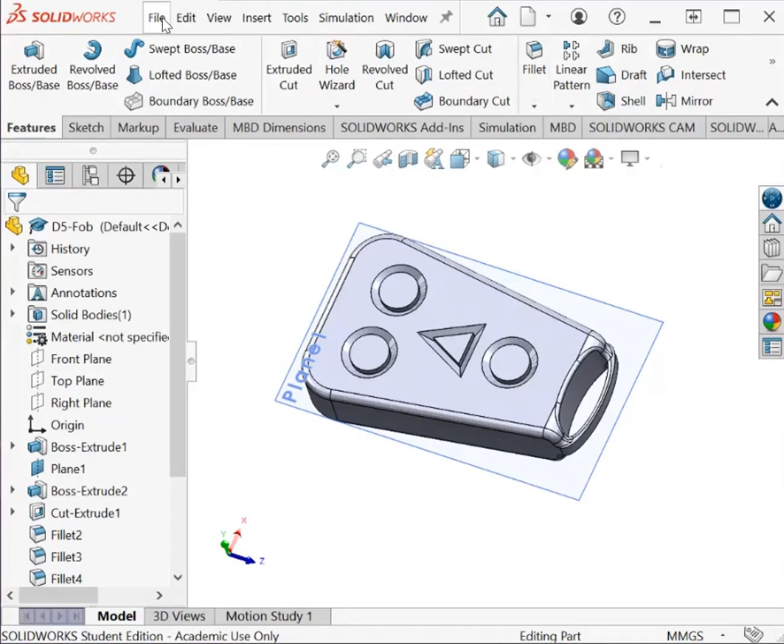Like any other part I draw, I'm going to get a new part to start with and hit OK. Now I have a blank drawing surface. The first thing I want to do is start my sketch, and I'm going to sketch basically a trapezoid.

I'm going to sketch on the top plane, and put a center line in, because this is also a good opportunity to practice our mirror tool. So I have a center line in here. If you draw a regular line, that's fine, just make it for construction.

Then we're going to draw in half of the trapezoid, going from here to here. Notice I'm waiting for the lines to pop up, showing parallel. For that center line, it doesn't matter that it sticks up on one side or the other.

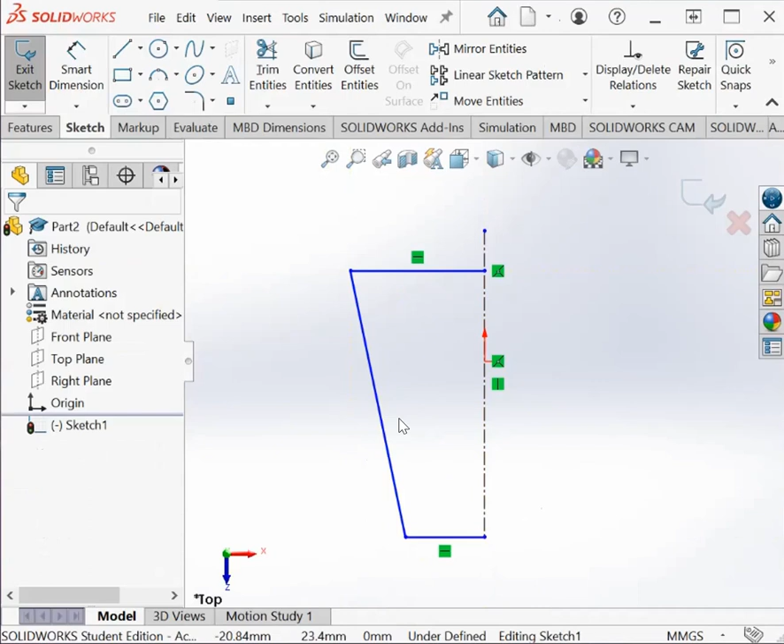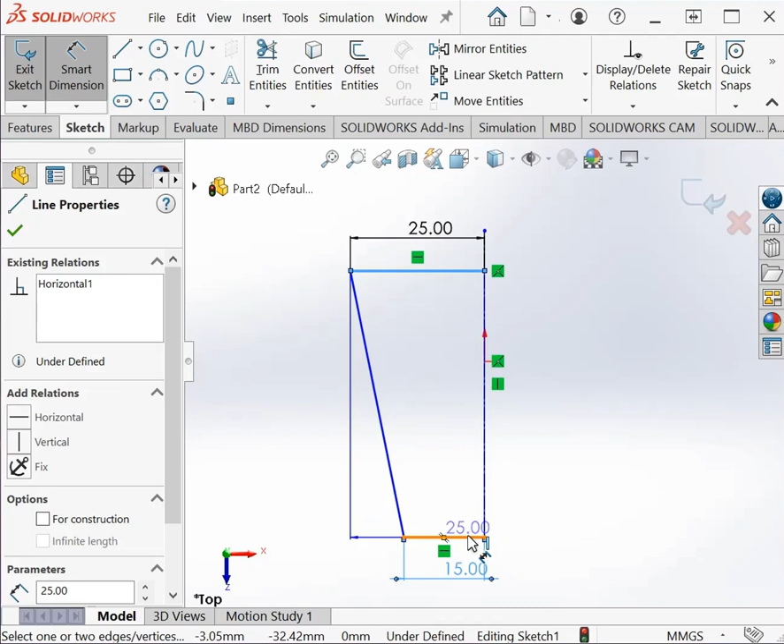Then we want to dimension it. I'm going to dimension this, scroll down to the number, that should be 25. And then this one's going to be 15. And between these two lines is going to be 70. If I had made this the same length as the line, I'd have just one line to make 70, but now I have two separate lines, so I need to select this line, hold down the control button, select this line, and then make that 70.

I'm going to zoom out a little bit. Notice my center line doesn't go all the way up - that should not matter. Now I want to mirror my entities.

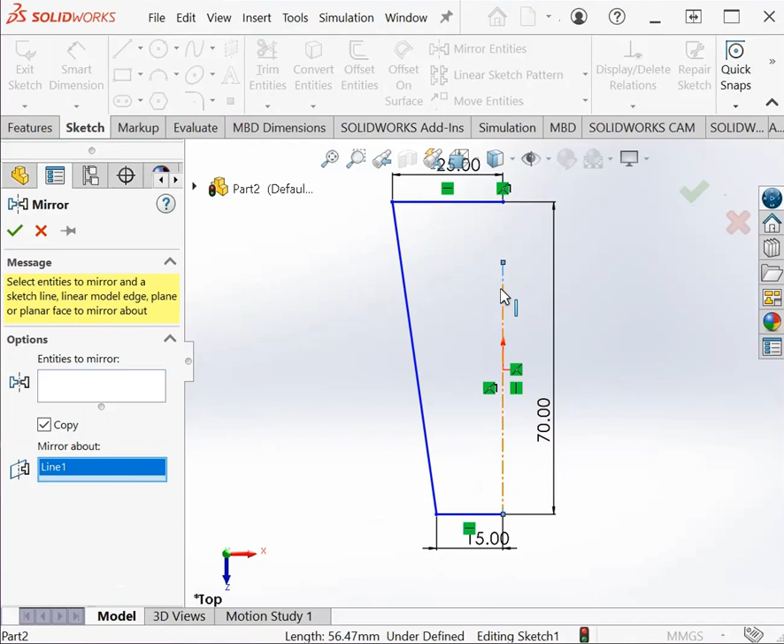I like selecting the mirror about first, so I'm going to mirror about that center line. The entities to mirror are the three lines that I just drew. That's why I like to select this mirror about, so I can see that it's correctly drawing those new lines, and hit enter. So now I have a trapezoid.

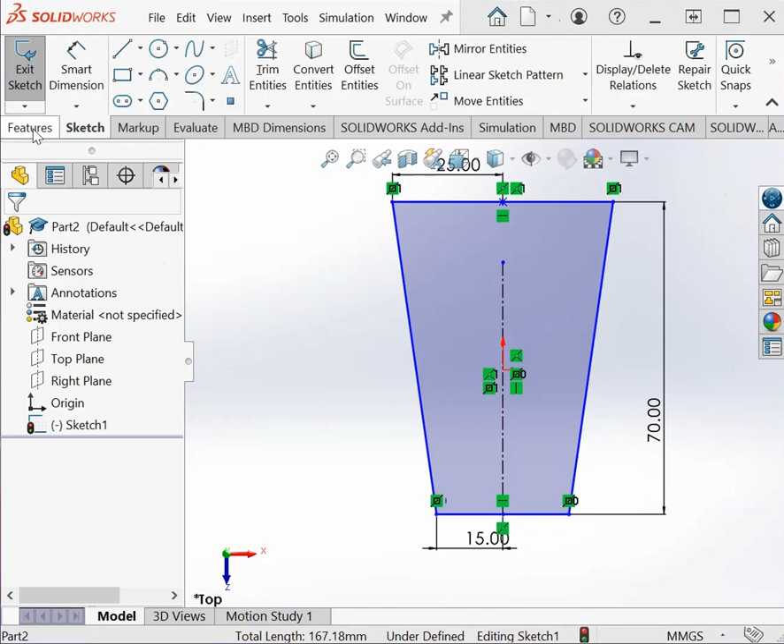So that is a fine trapezoid. Then I now want to extrude it, and we're going to go up 15, because that's the thickness of the key fob that I have. So that's 15 millimeters, 1.5 centimeters, and we have a nice trapezoid.

We are eventually going to round off these corners, but for now we're going to leave those be, and we're going to sketch a little ring down here to put your key ring on.

To do that, I want that in the middle of this. I could have maybe drawn this up and down, but it's still hard to select the top plane at this point, so I need that reference geometry.

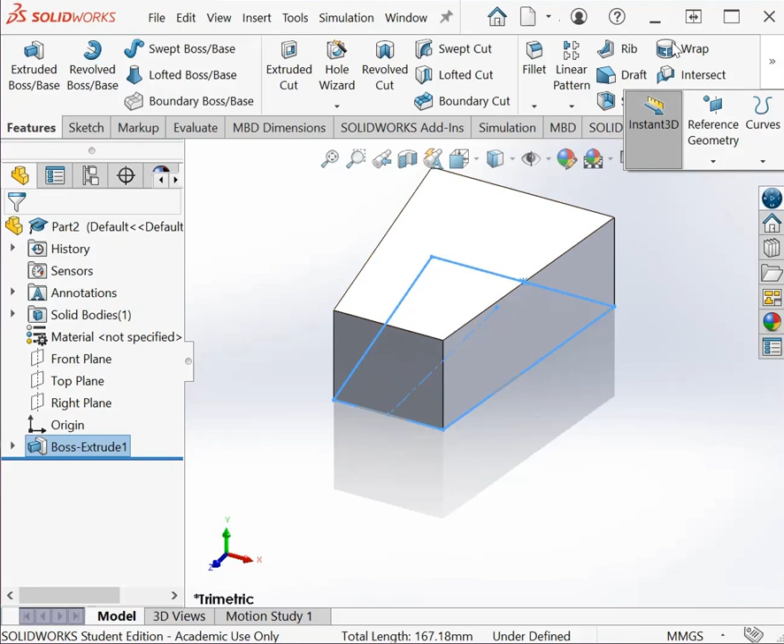My screen's a little narrow right here, so I'm going to go up to reference geometry - if you have your screen full screen, you should be able to see the reference geometry right there. We're going to put in another plane, and we want that plane slicing through the middle of this thing. So I'm going to make it parallel to the top plane at 7.5. It's not my first time doing the part, so I already knew I wanted it 7.5. It probably says 10 to you if you haven't done this before, but change it to 7.5, because that is half the thickness of the part.

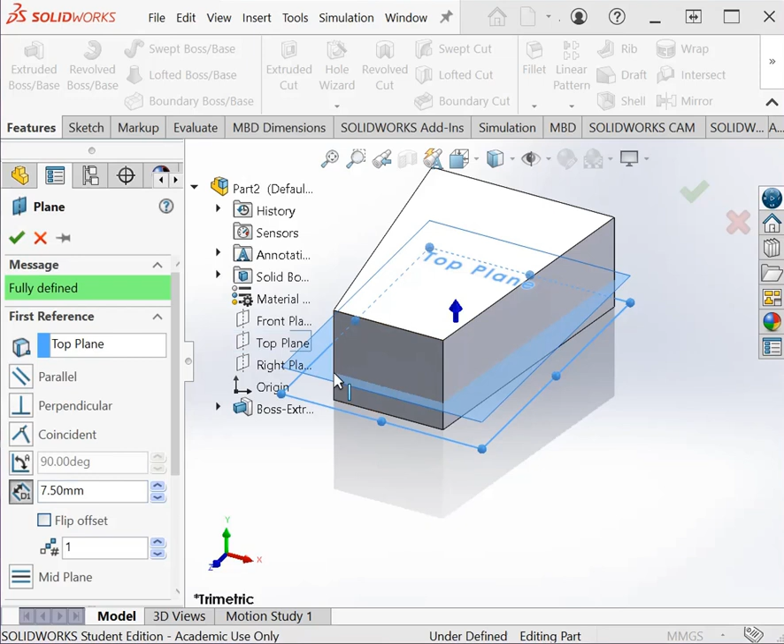So it doesn't look like quite half the thickness. I'm going to make that — it looks like it's way too thick. So if I want to go in and edit it, it's 25. I wonder why it looks so thick. Anyway, so I want to edit that.

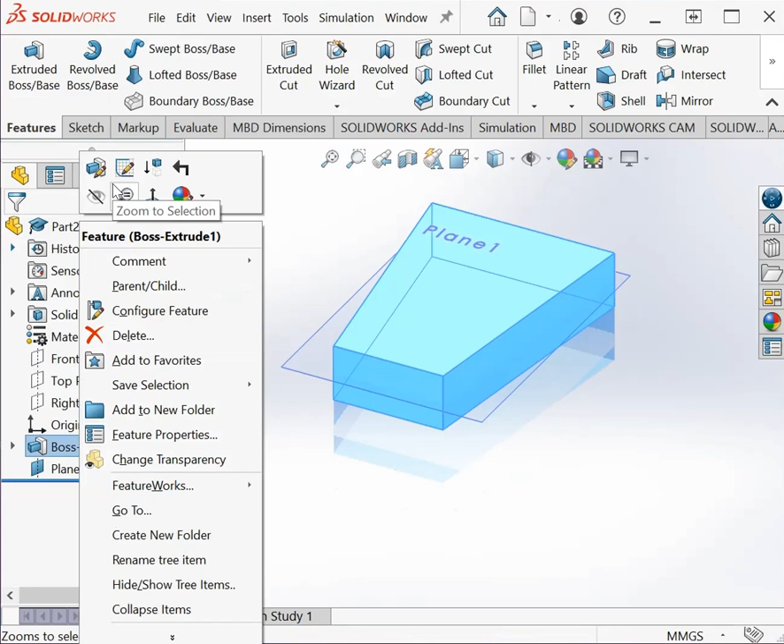How I did that again is I right-clicked on my Boss Extrude, went up to edit feature. We could also have edited the sketch up here. We edit the feature and change that number to 15. Anytime you do that, it's good to hit the rebuild button, which you can't see because my screen is slightly narrow. So there's my rebuild button. Now I can see that plane is halfway through, and we have a nice looking trapezoid.

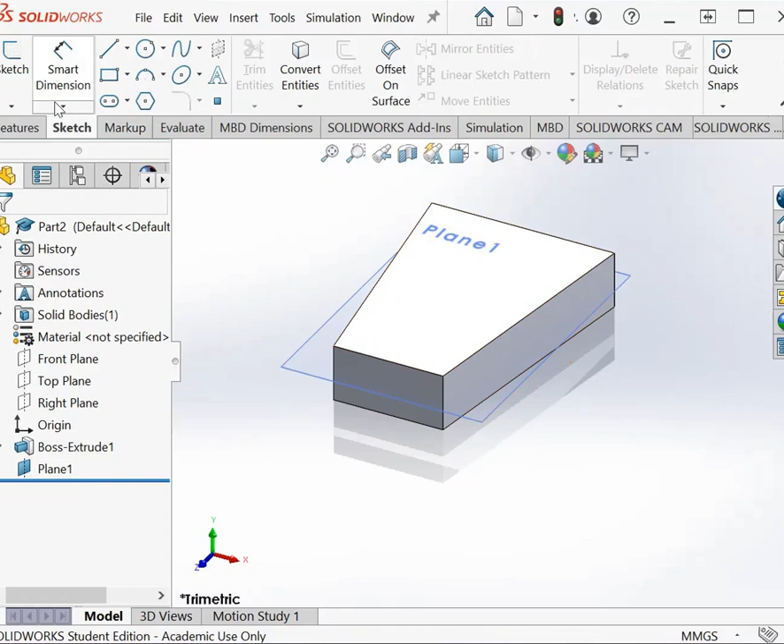Okay, now I want to draw a loopy loop on here, which I'm going to use an ellipse for. So I go up into sketch again, hit sketch, and it asks where I want to sketch on, and I want to sketch on that plane. I can either select that plane from here, or in this drop down menu I can select that plane. I kind of prefer the menu because I know for sure that I'm getting the right thing. Okay, so I want to zoom in on this area so that I can draw it.

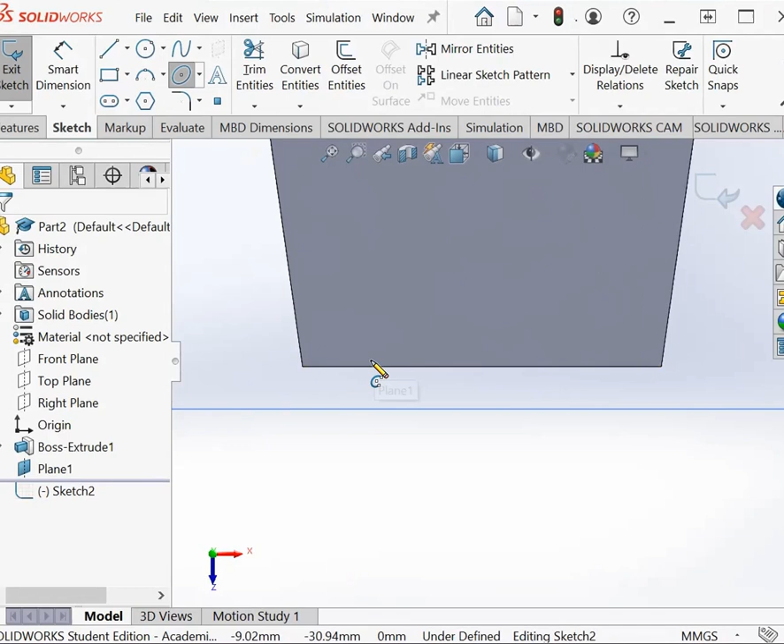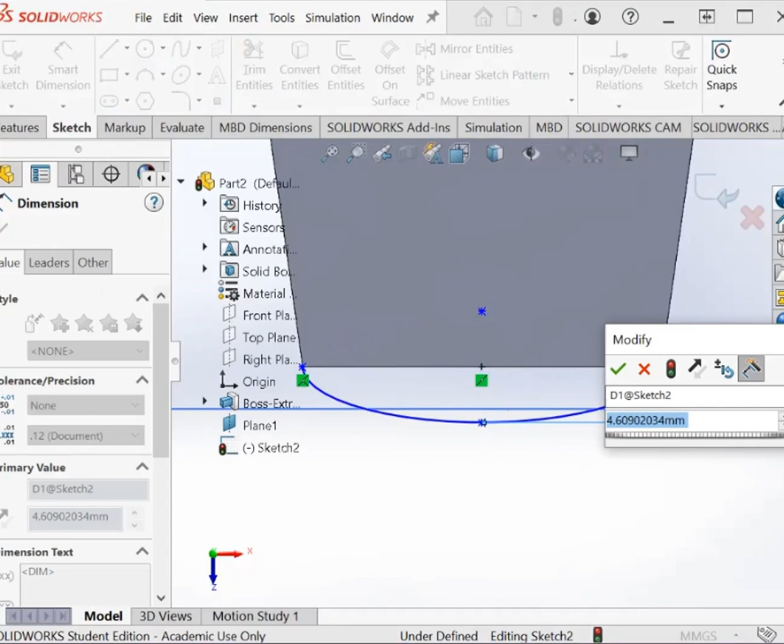And this, I'm going to use — we're going to start using ellipses here. So we're going to go to the ellipse and the partial ellipse. And so how we draw the partial ellipse, make sure that's selected. Okay, partial ellipse: we hit the center, then hit straight down somewhere that's nowhere in particular. Then I hit the side, and now you can see that I'm drawing the ellipse. Okay, cool. So then I smart dimension, and I want the dimension from here to here. So I'm going to select that line and then hit the control button, and I want that to be 5. Okay, that's a fine looking ellipse.

So we got the dimensions done, and if we start to extrude this, it's not going to extrude. It's going to be like, I don't know what you're talking about. It's not a closed sketch, so we can't extrude this part yet. So we need to close that sketch.

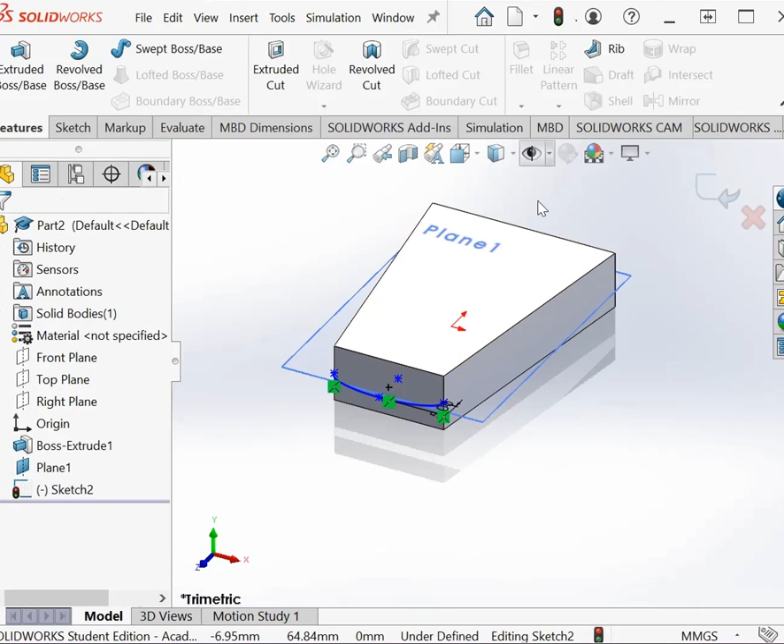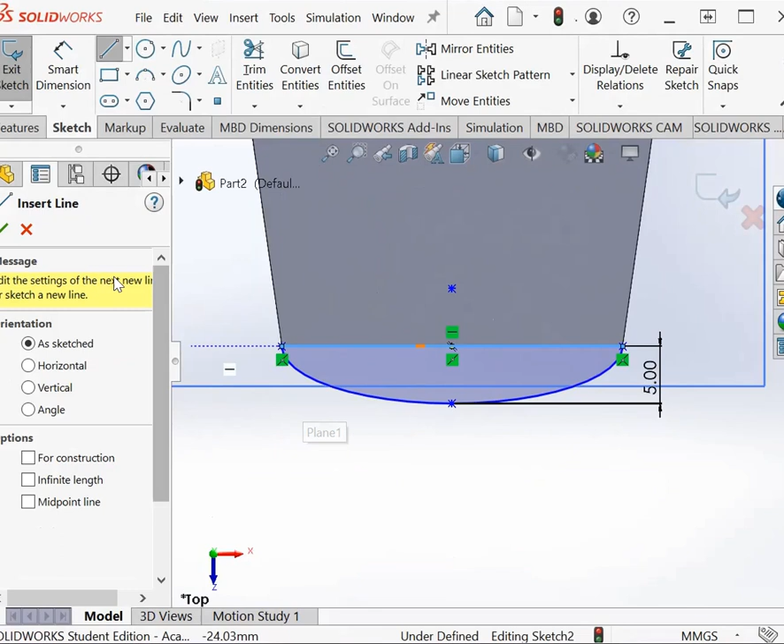So I'm going to go to the top view again and zoom in on that area so we can see. The next thing we want to do is draw in a line here. Even though there is a line there, it doesn't have it on that plane. And now you can see that that area turned blue, indicating that it is in fact a closed feature. Okay, so we have that closed now. So now I can extrude it.

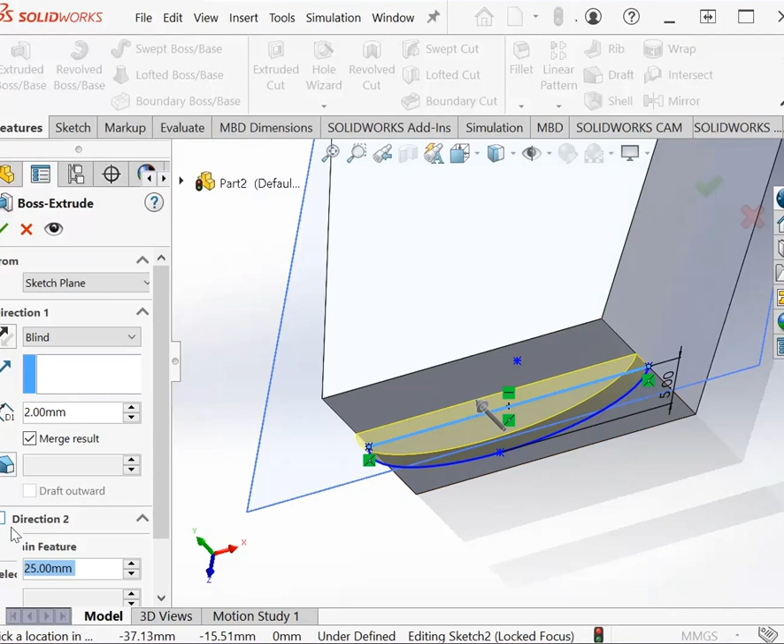Okay, so I'm going to rotate it so we can see what it's doing. And that looks funny, I just want it up and down a little bit. So I'm going to make it go up 2. And then we want to do direction 2 and have it go down 2 as well. Okay, so that's up and down 2. And that looks nice.

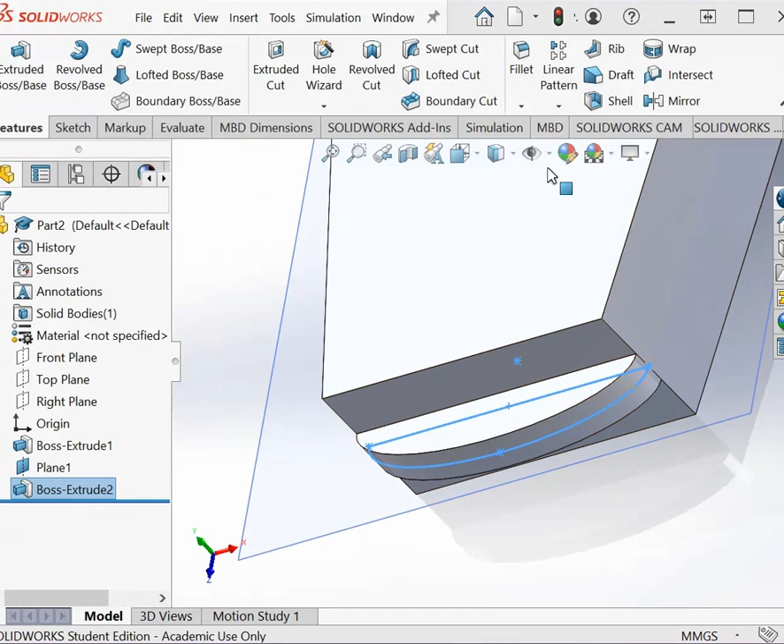So now we have a little bump on here, but that's not going to be very useful for putting an actual keyring in until we put a hole in it. So now I go to the sketch button again, sketch. And I want to select this very top plane because I want that whole area to go all the way through and make a hole in the main part of the body as well. So I'm going to select that top plane and then zoom in on that area.

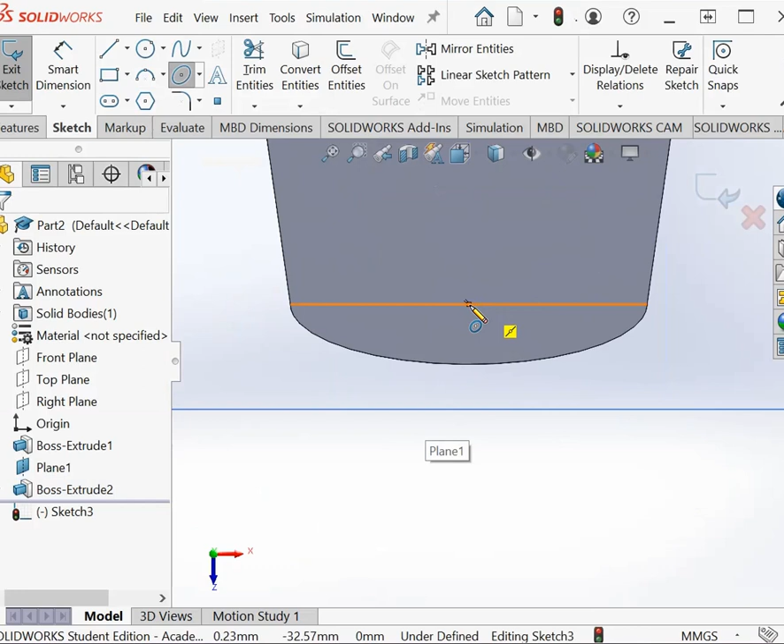And we're going to draw another ellipse, but this time I want a full ellipse. How you draw an ellipse is we find that center point. You notice that we get that little yellow square that starts to turn orange when I select it. And then we select — you can go down here, and then we basically select the major and minor axis. It doesn't matter which one we select first. So I'm going to select the major axis first, so somewhere over here, and then somewhere down here.

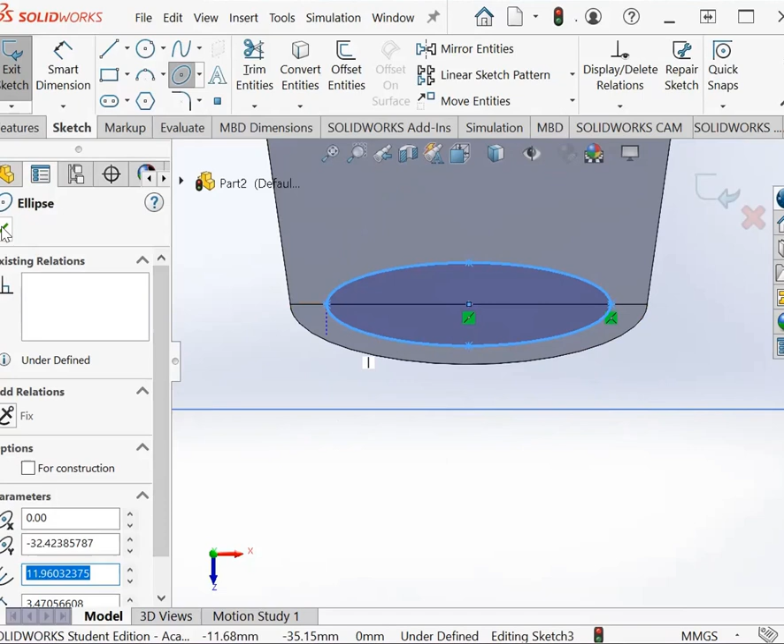Okay, then we need to dimension that. So smart dimension — this needs to be dimensioned 3.5 here. So select the center of it, then hold down the control key and select the edge, and that we want to have be 3.5. And then we want the major axis to be from the center to the outside, and this is going to be 11.5.

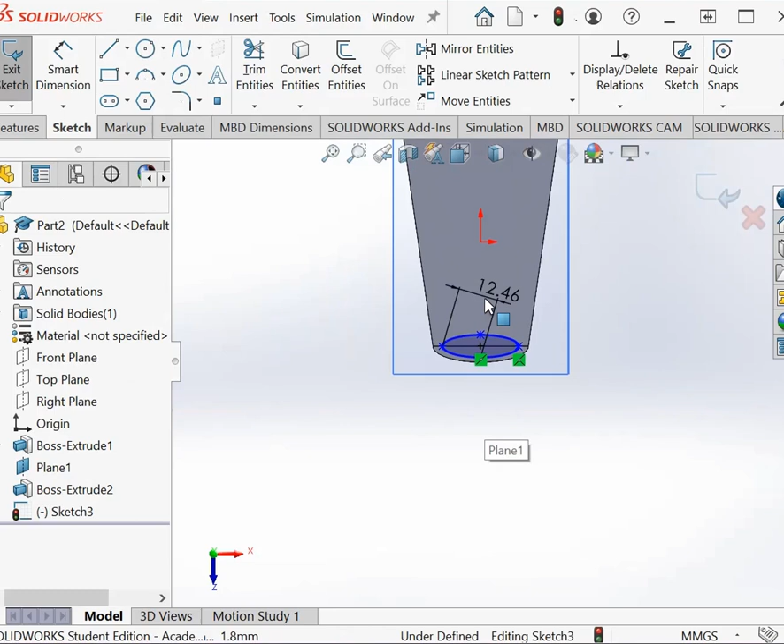Oops, from that corner, we don't want that. Delete that. I think I lost my other one. So we could also have done from here.

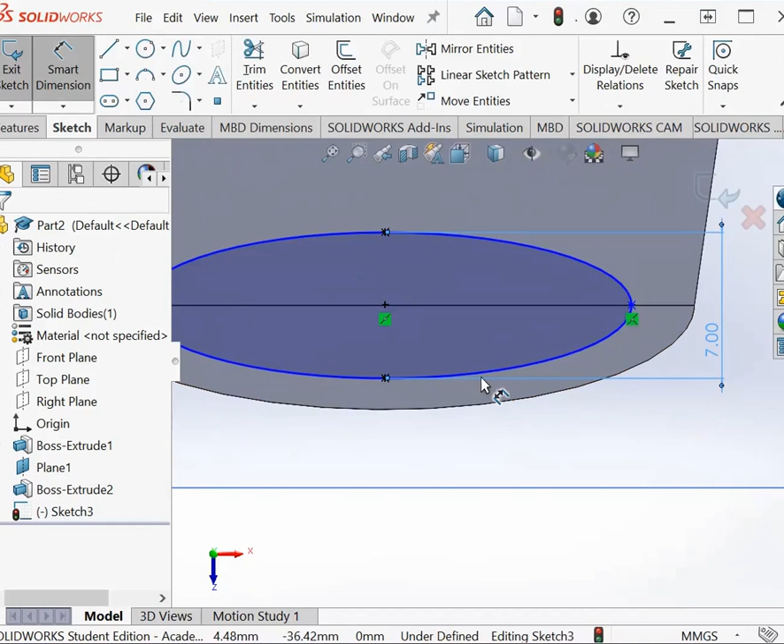Select the top of the ellipse, hold down the control key, and the bottom of the ellipse, since I want it to be half to be 3.5, I want the whole thing to be 7. And then I'm going to unselect smart dimension and reselect it to make sure it's cleared. Center of the ellipse to the edge of the ellipse, and pull that up, and I want that to be 11.5. It was pretty close.

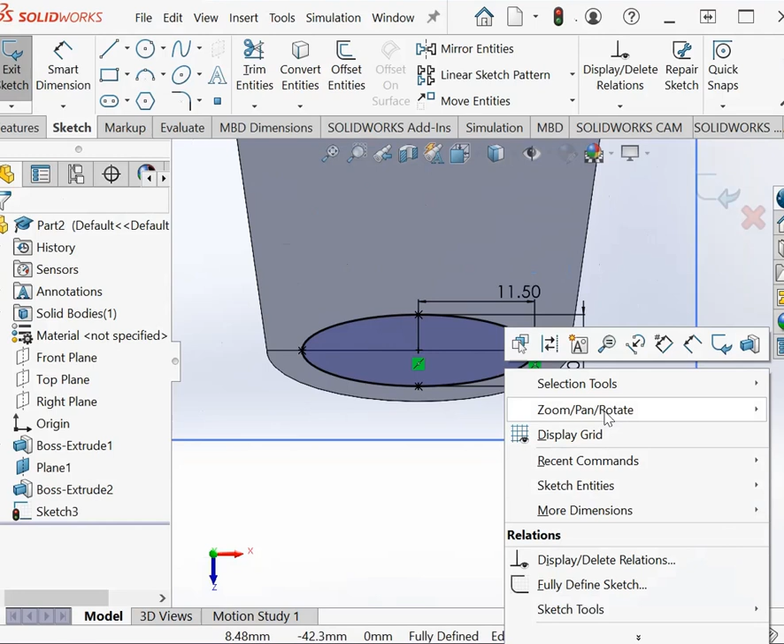So I'm going to get off smart dimension before I can rotate it. Now we're going to put a hole in the whole thing. I'm going to tilt that so you can see that that sketch is in fact on that center part of the plane, on the top part of the fob.

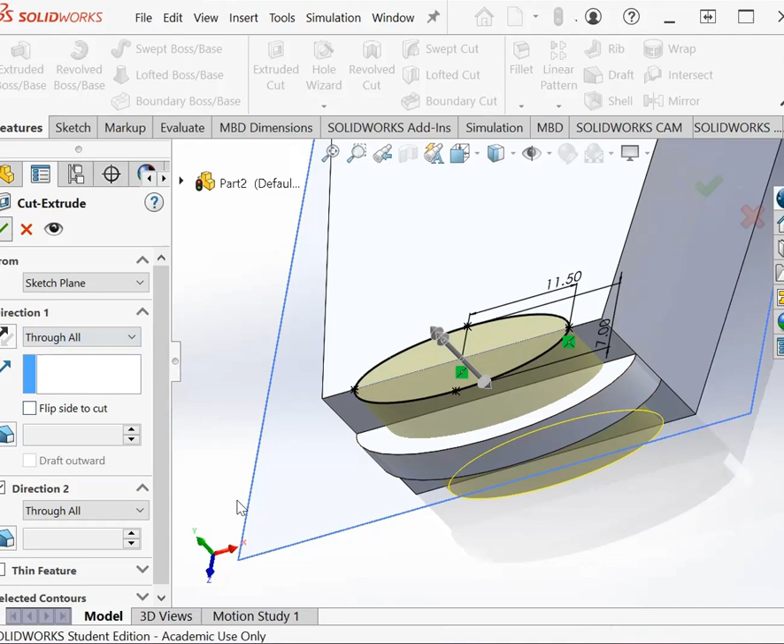I'm going to go to features and extrude cut and cut all the way through the thing. The easiest way to do that is through all both. You can kind of play with these to see what it does. Through all and through all both should do about the same thing, but if we did up to next, then it would just cut the main part of the body. So I'm going to do through all and hit OK. Now I have a nice hole in the whole thing for my keychain.

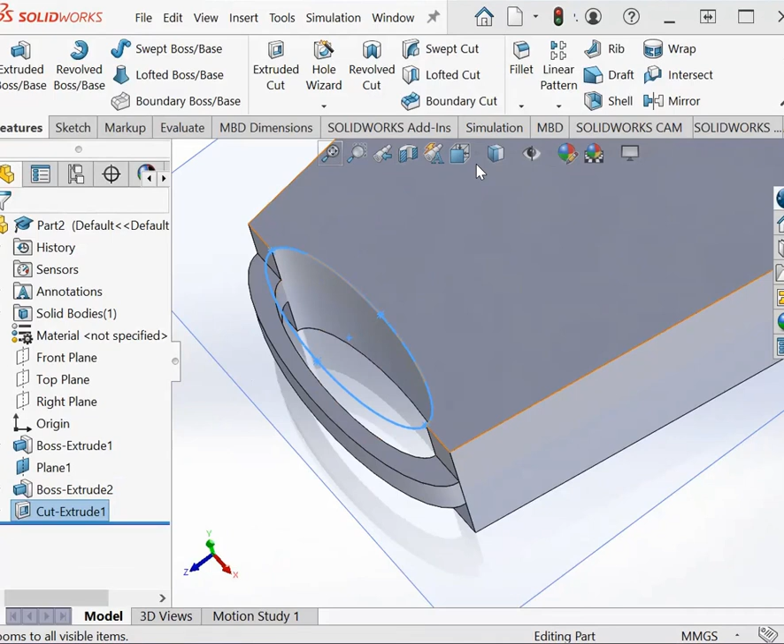Okay, so the next thing I want to do is start rounding off these corners, and we're going to use the fillet tool. We're going to look at the top view again, but we want to get up into these corners. I'm going to rotate it a little bit so I can see those corners coming at me. Don't worry about the shadow thing, it's just there. So the fillet tool.

So we're going to go to fillet, and the first thing we want to do is round off these corners. Here we have different fillet types. We're pretty much just going to use the standard fillet here. Items to fillet, which we're going to select. And then our radius of fillet is 10, and that's what we want it to be for these top corners. So I'm not going to change that number, but we need to select our items to fillet.

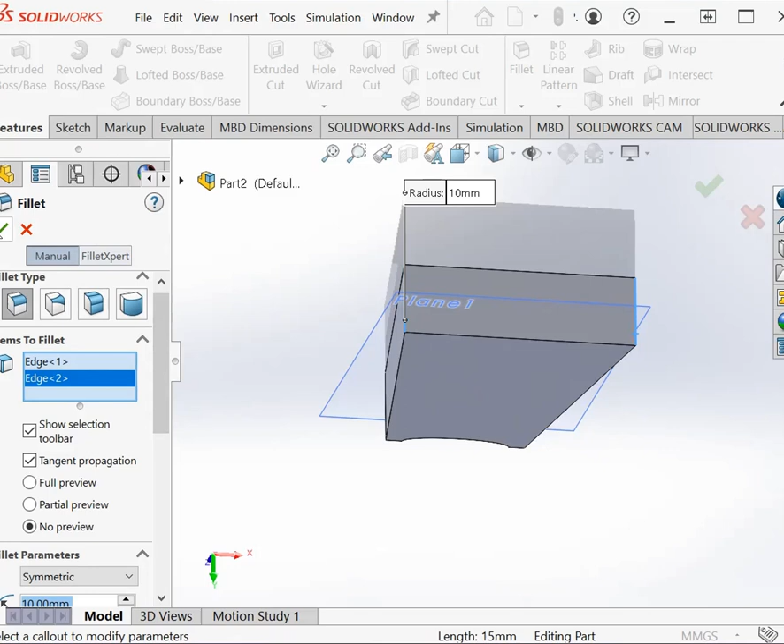So to round off those corners, I just select the edge that is the corner, and it's not going to give me a preview for whatever reason, but I hit check, and then I get nice rounded corners. So again, we can rotate the view, you can see that those are nice rounded corners. And I don't know why we get a mirror on it in some views, but anyway, don't worry about the mirror, we have nice rounded corners to start.

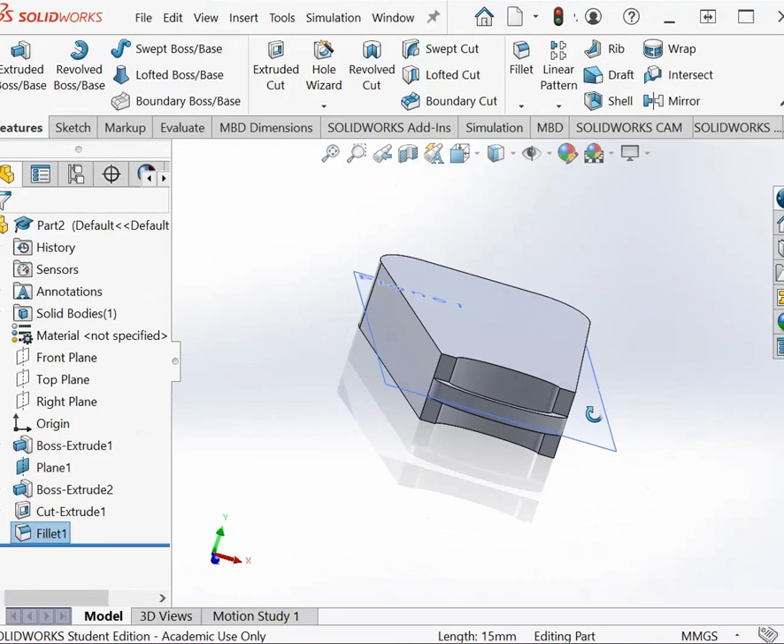Okay, then I'm going to rotate the fob this way. So I'm going to start rounding off the corners down here. Now is also a good time to save your file.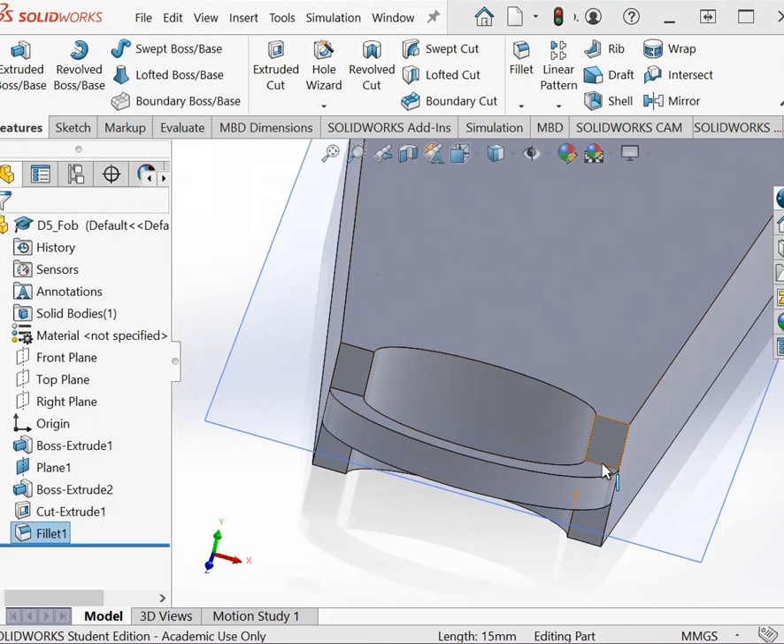So we're going to fillet again, but we want a much smaller fillet. A 10mm fillet is not going to make any sense there, so we want to just do a 2mm fillet. I'm going to select that number and put 2 down there, and then scroll up to here, and then I'm going to select these corners.

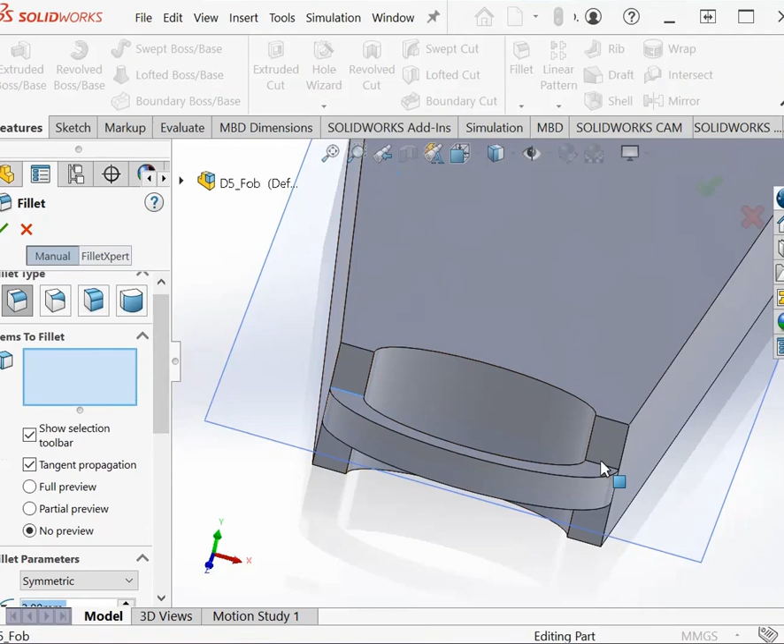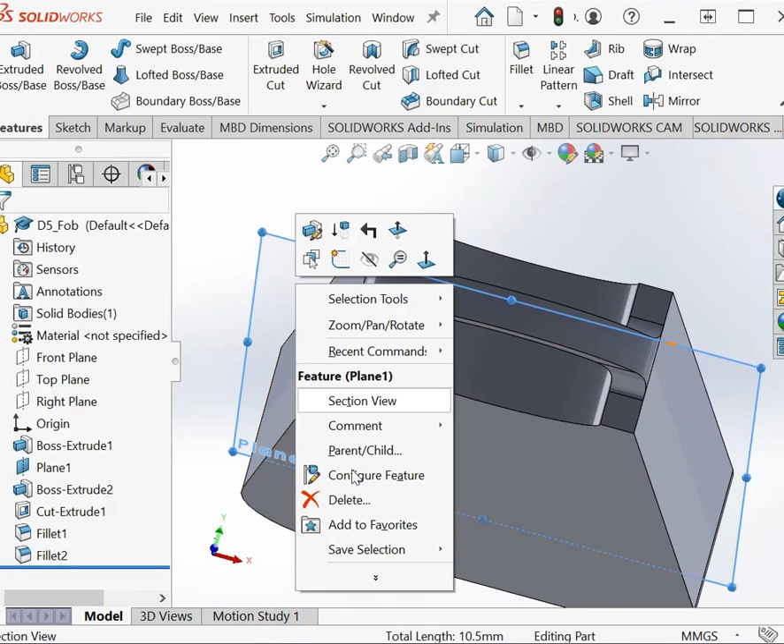And we could do this in 2 separate steps. So I'm just going to rotate the view and keep selecting these edges. I got to get out of the rotate tool first, and then select that corner and that corner, and then hit the check. And now you see we have a nice rounded corner there. So rotate the view so we've rounded off those corners.

Okay, then the next fillet we want to put in is on this top, very top edge here. So again, I'm going to rotate the view so I can see that a little bit better. And we're going to do another fillet.

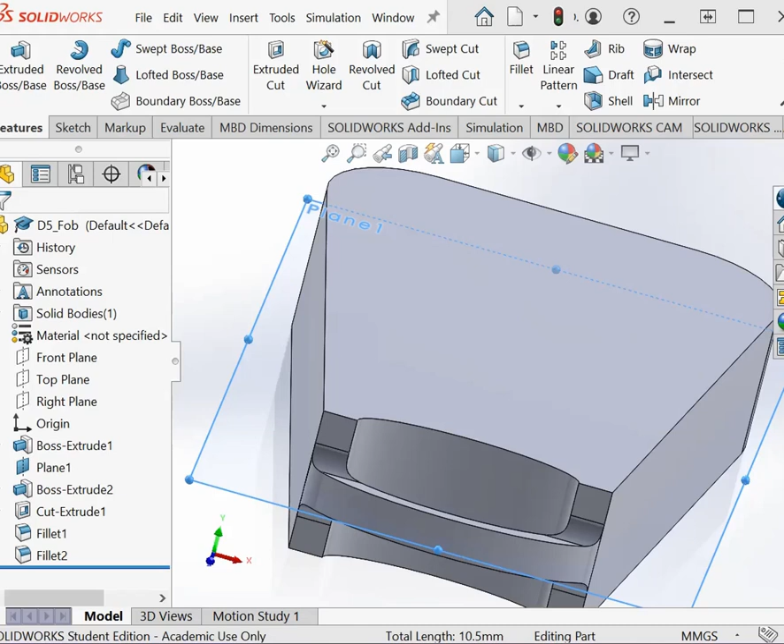Okay, so now we're going to finish this off, the chamfer, the fillet. We're going to put the fillet here, and I want to fillet the area we're looking at on the fob at 2mm. Then I want to select these corners up here. It wouldn't hurt to select this top edge too.

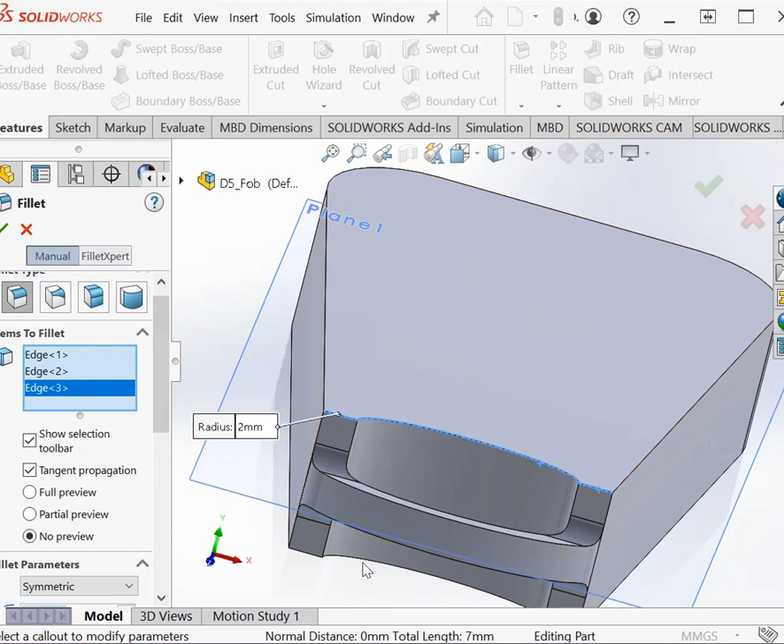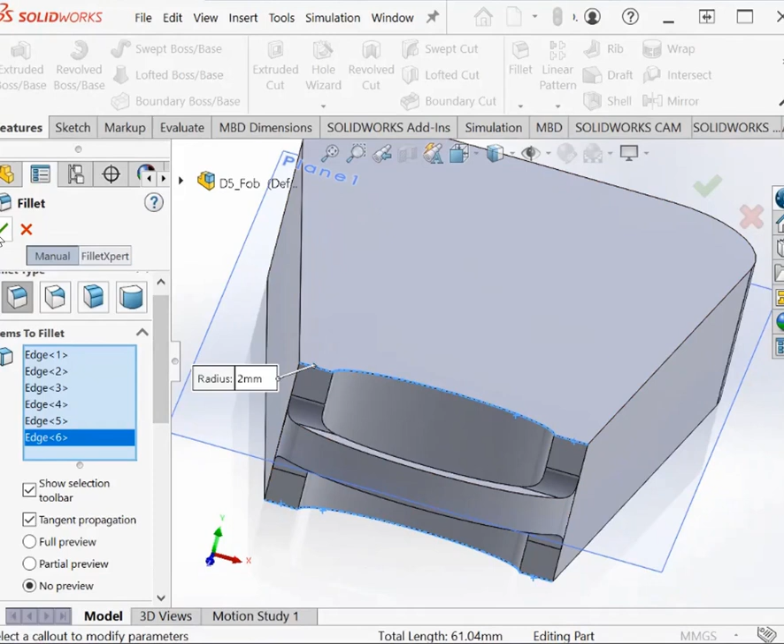I'm going to have to move this part, so I'll hit pan and move it up slightly to get that last edge I want. Hit escape and hit that last edge. Okay, so I have all of this area on the top and bottom selected. We're going to go ahead and round that whole thing off. This is looking like quite a nice, handsome part now.

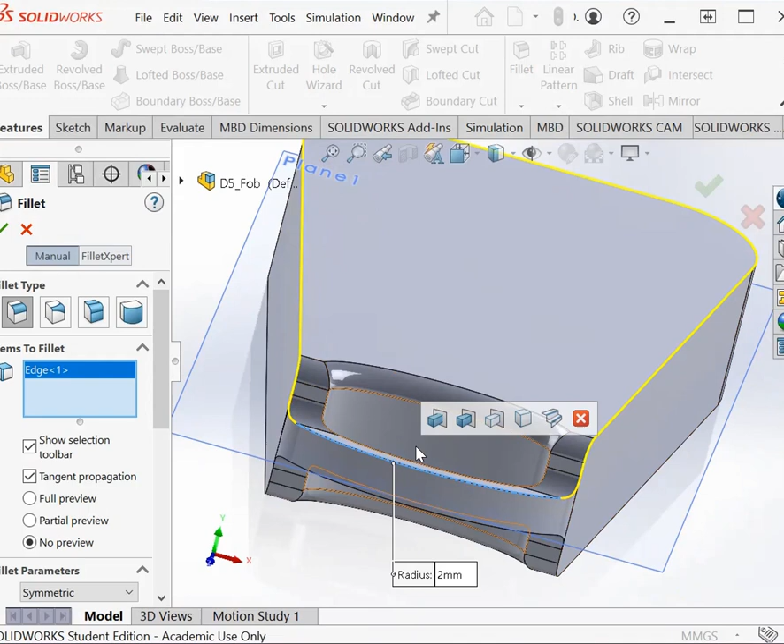Okay, so we have a couple more edges to round off. We want to round off this handle now. We're going to fillet it with the same settings, and we probably could have selected all these with it, but I just don't like to get it too confused. So rotate up, so I can see that inside of that line. Then rotate down so I can see the bottom part of that line.

I didn't have my fillet tool on. Okay, we'll try that again. So fillet, I'm going to fillet this handle, and I should be able to also just select that surface. If I want to clear these, I right click on the items to fillet and hit clear selections.

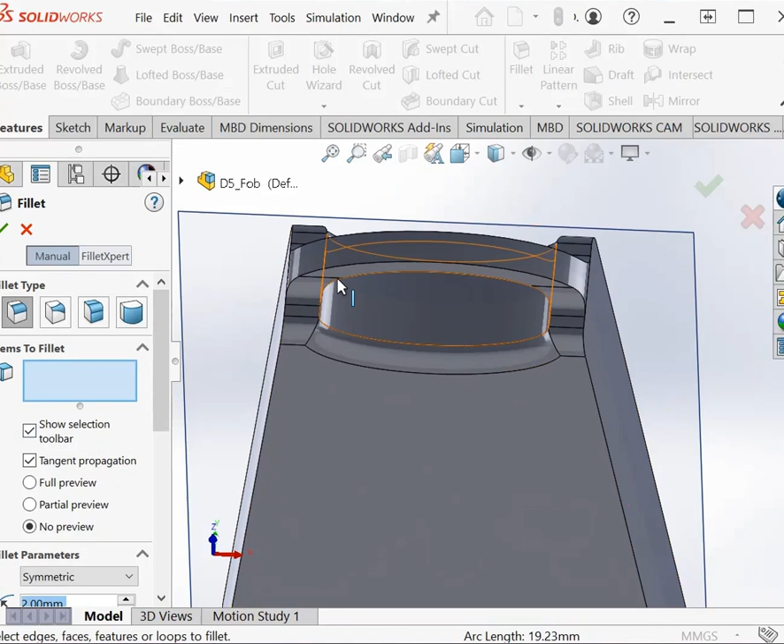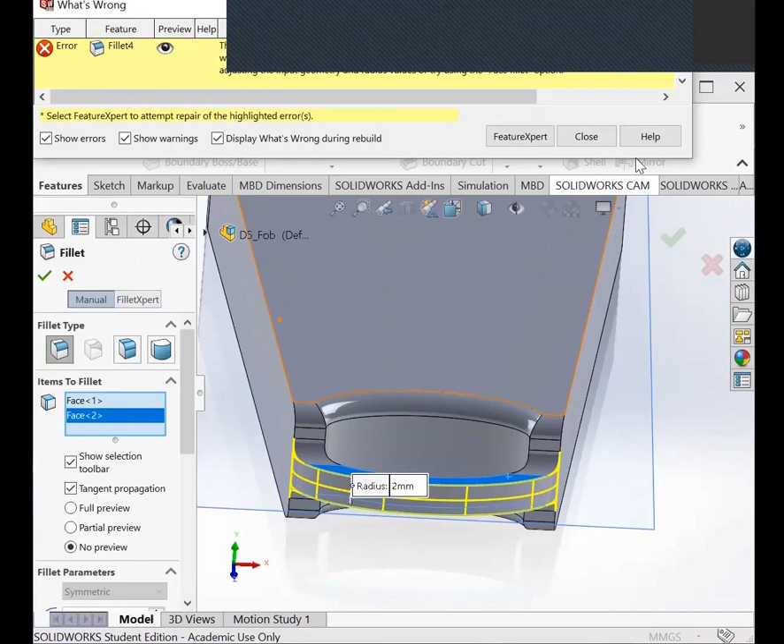So I'm going to select that top plane, then rotate view. Selecting the plane should fillet every edge on the plane. If it does it correctly, it might complain. Yeah, it complained. So instead, I'm going to clear that selection and select just those edges I want to fillet.

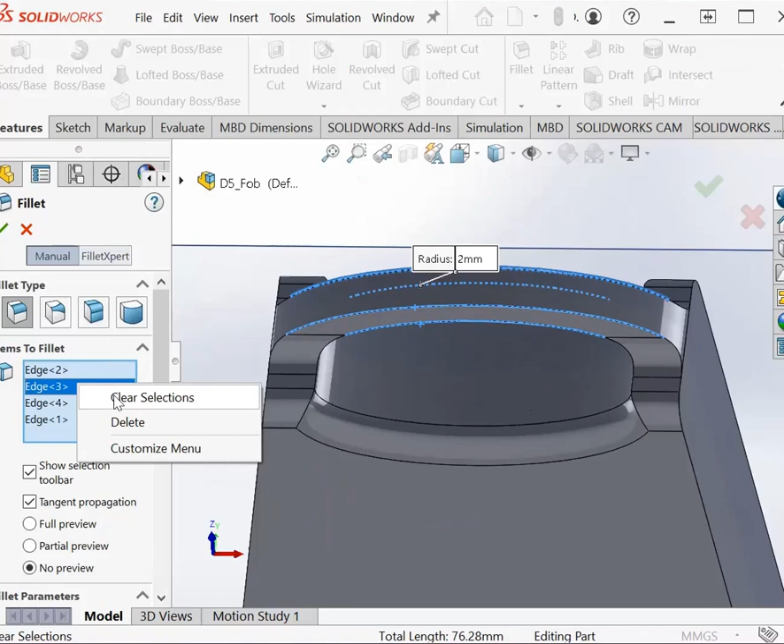So I'm going to fillet that inside edge, this outside edge, and then rotate the view. Zoom in a little bit on that area. So select my items, fillet again, and do the top and bottom of that one, hopefully that'll work. No, close. Okay, well, I guess I selected too much. Clear selections. I'm going to build the outside of it first then.

So sometimes you get too much and it complains. I'm just going to do the outside edges of this first. Hopefully it's all happy with that. No, close. Okay, well, I'm not really sure why it's not working.

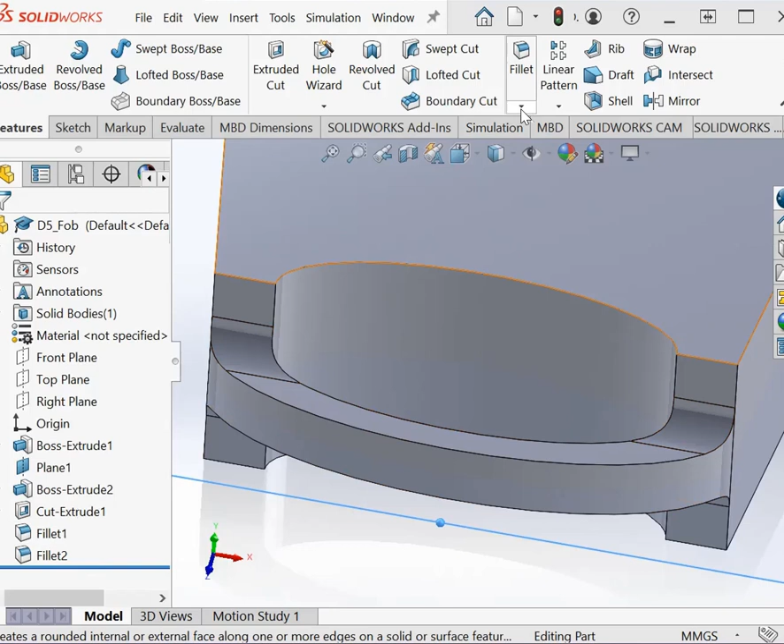Okay, so I think I got it figured out now. We're going to fillet, and I had undone this fillet, so I'm going to redo it real quick. So I'm going to fillet this edge and this edge and this edge, and then refillet that guy to 2 millimeters. Make sure this is at 2 millimeters.

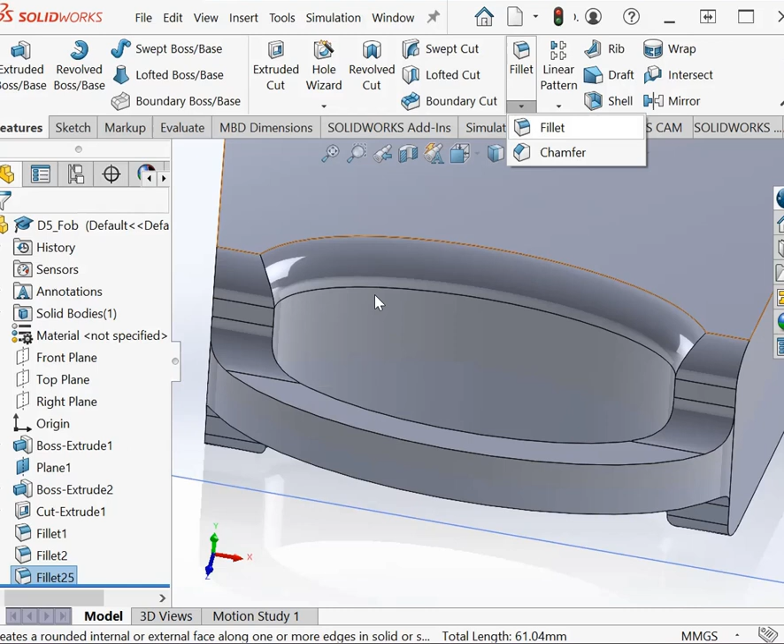Okay, and then we want to fillet this little handle thing, but we're going to have to use a smaller fillet on it. So we're going to fillet that. Otherwise, you're going to get an error if you use the 2 millimeters. So I'm going to do it to 1 millimeter because it's a smaller part, and then it works. This program doesn't like it if you have a radius that's too big, it just can't do it.

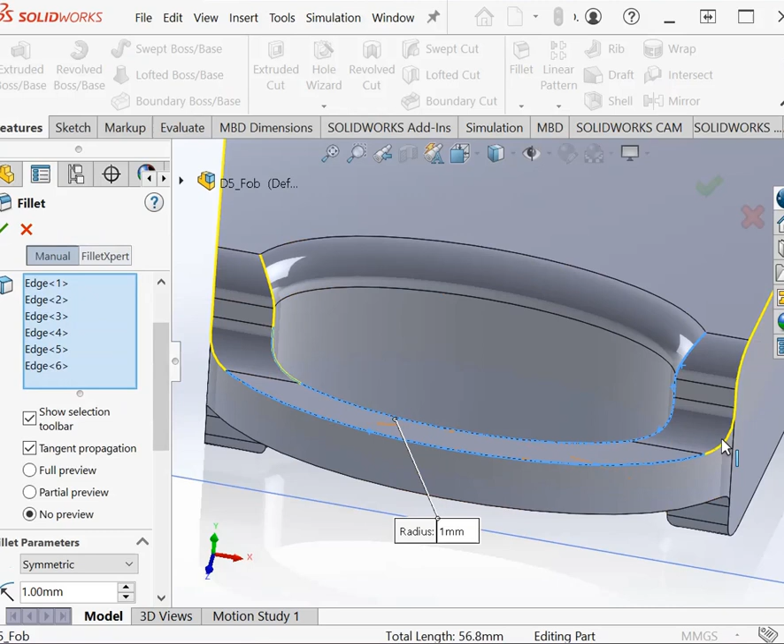So I'm going to select the inside of the handle and the outside of the handle. You see how some of the other lines turn yellow? These are the lines it also wants me to fillet with it, good suggestions to fillet with. So I need to select each one of those little sections individually, and then I don't want to go all the way up the part, I just want to go up to that section.

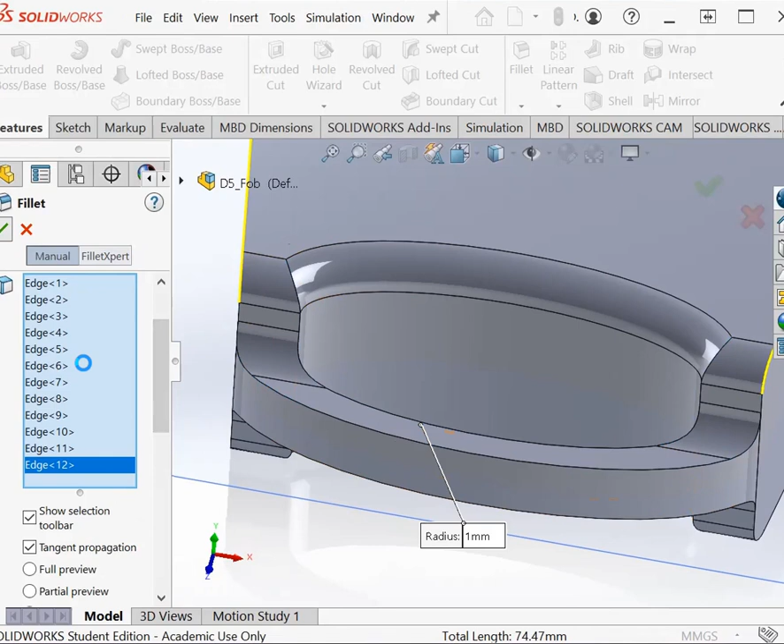So I'm going to have to pan over, so you can get that last little part. Okay, so I have a whole bunch of basically the inside and the outside of that keyhole to fillet at 1 millimeter. So I don't want to select too much, so I'm going to do this, the bottom part, in a separate step.

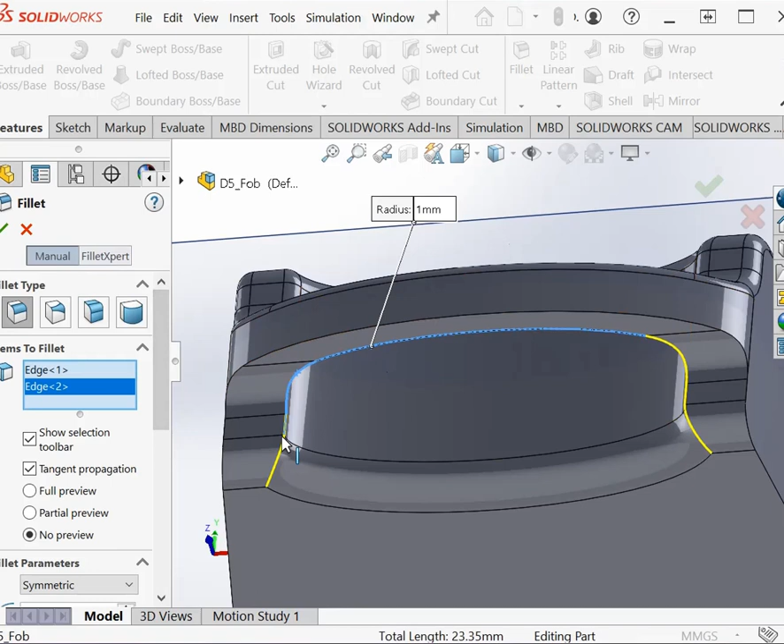So I'm going to do this part now. Hit the escape key and hit the fillet tool again. It should already be set to 1 millimeter, but I have to scroll down and check. I'm going to do the inside and outside of this as well now, with a slightly smaller radius.

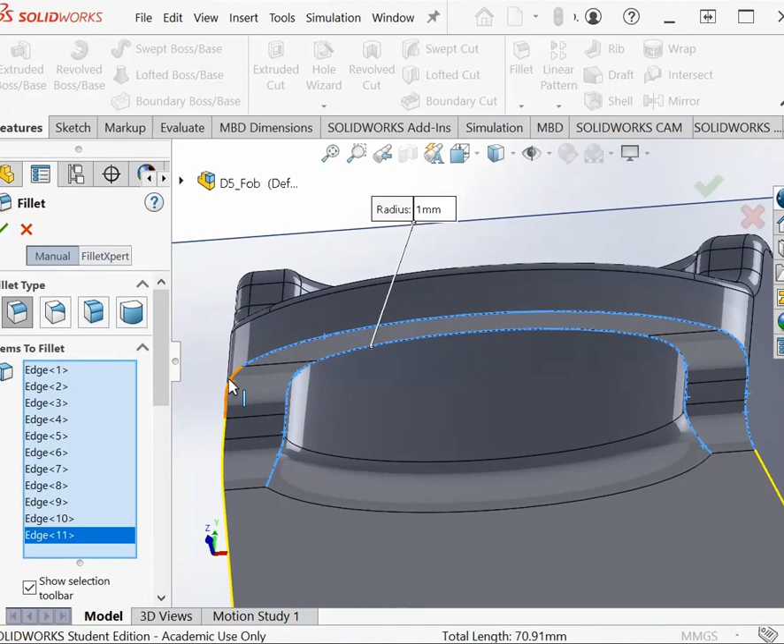Those yellow lines are helpful to highlight when I want to select. So just go up. Whoops, not that - if I hit the wrong thing, I can hit the delete button and get rid of that. Select it and hit delete. I'm going to do the same thing up here. Actually didn't want that base, so I can just unselect it.

Okay, that looks good, so hopefully that fillets correctly. Okay, looking good, and now I want to fillet. Looks like it also filleted around the edge all the way with a thin fillet, so I'm just going to leave that - seems happiest that way. Last time I drew it with a 2 millimeter fillet, but I don't think I can fix that without making it very grumpy.

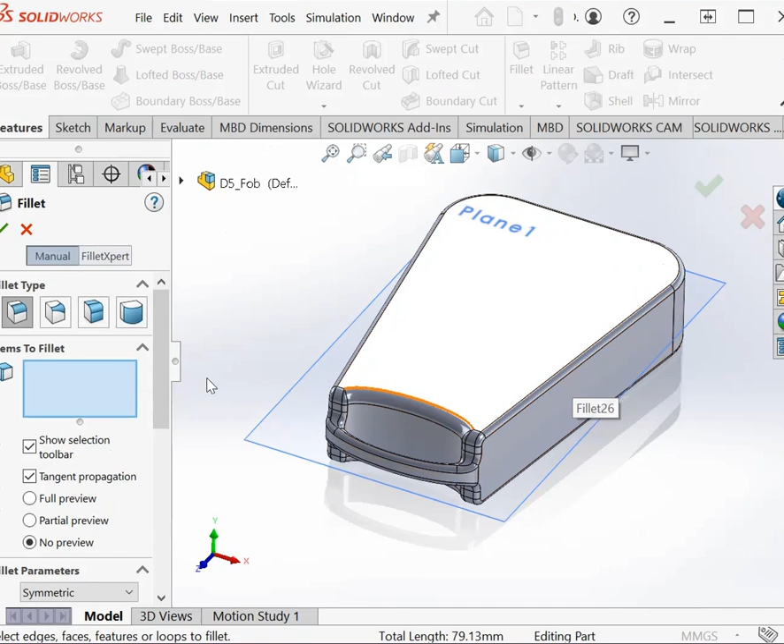Because we can't select that corner anymore, okay, well, we're just going to go with that - so it's a small fillet. We could also see if we can edit this whole fillet to be 2 millimeters. So I right click on it and then I can go back into it again and hit 2. It might complain. Yeah, it's complaining, so I don't know how big of a fillet I can do. Let's try 1.5.

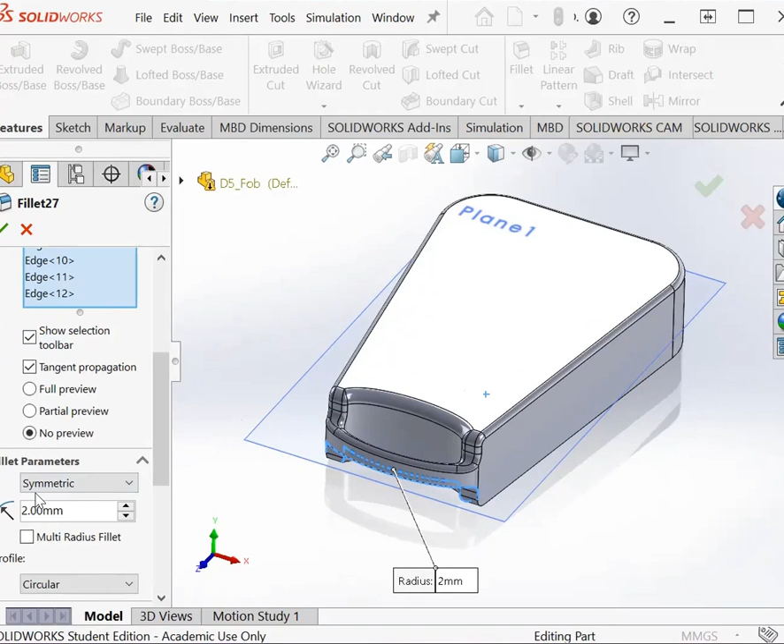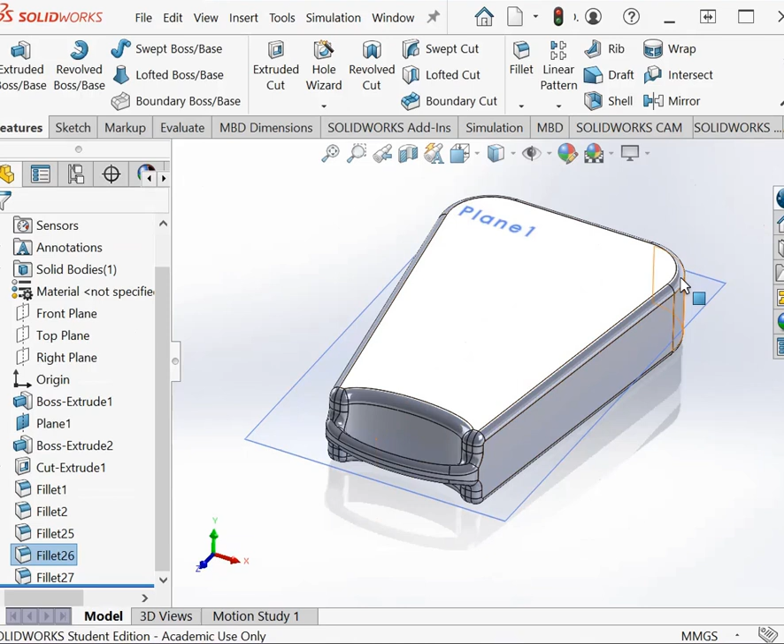Okay, that looks good. And if I right click on this one, I can get into the edit feature menu, which makes the top and bottom the same. I'm not super concerned about what that number is, just that it looks nice. Okay, so we got the whole thing nicely filleted. If it didn't fillet, you would have to select these edges around, or select the top plane and the bottom plane, and it should finish putting the fillets in for you.

Almost there. So now I want to select my top view again, because we've rotated it so many times, and now I want to draw buttons in, because it's a nice keychain at this point, but we want buttons. So we're going to put some buttons in.

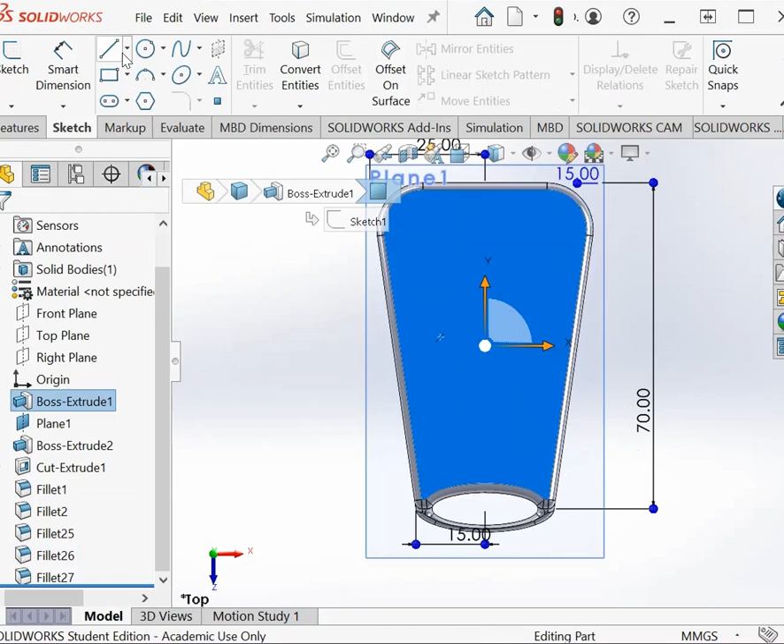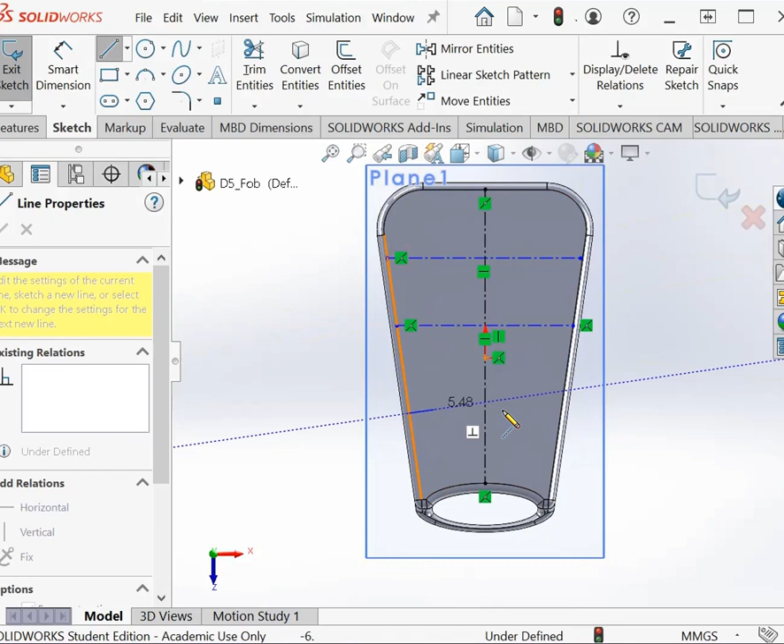I'm going to start by sketching on that top plane, and putting a center line in for reference. I'm going to put a few more reference lines in, just so I can place the circles and the square. I want to pick no points in particular - I want to draw one line vertical and 4 lines horizontal as reference lines. Hit escape every time you want to end a line, then restart the draw tool. Hit the left side, hit the right side, then hit escape. I'm making all of these for construction.

And then we are going to locate each of them. So from the top, I want to locate this first center line - from the top it's going to be 14 down. I select the top of the part, hit the control key, select that first center line. Now I want it to be 14. I think I drew these so close together - it's actually going to start from the top and things will shift automatically.

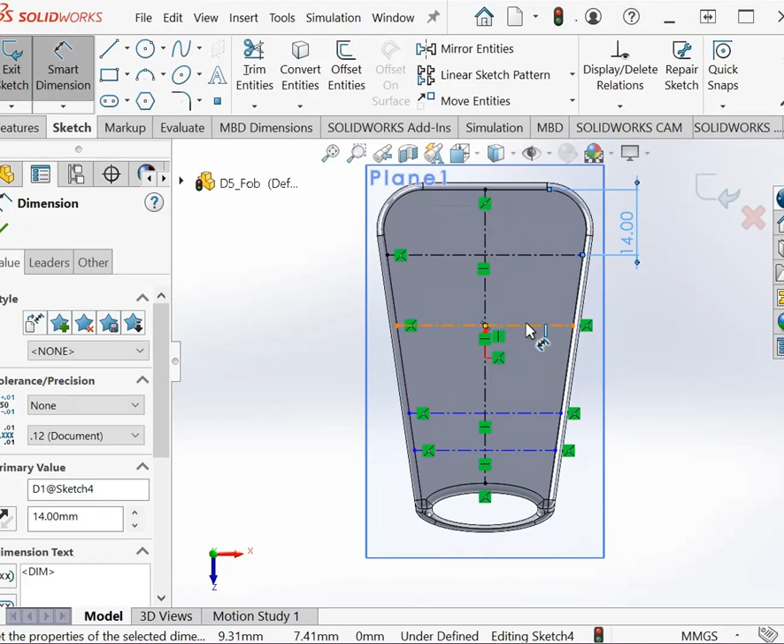So hit the top line, use the control key and hit the line just below it - this I want to be 9. That moves it up quite a bit. Then hit that line, control, hit this line - we want 12 between those two. And then finally this one, and that edge of the ellipse should be at 15. Okay, shifts everything up. Great.

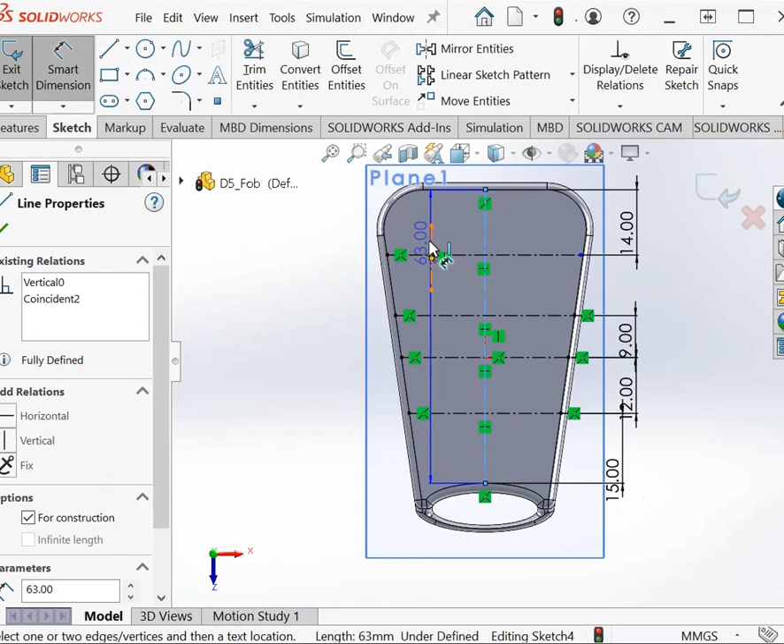So nice looking part. Now for this, I'm going to have 2 holes in the top, so I'm going to draw a vertical center line here so I can locate the center of that hole. Again, hit the center line, then hit the control key and hit that new line you just drew in - this one should be at 9. I'm not going to draw on the other side because I'm just going to use the mirror tool to get it to the other side. I'm going to draw my circles.

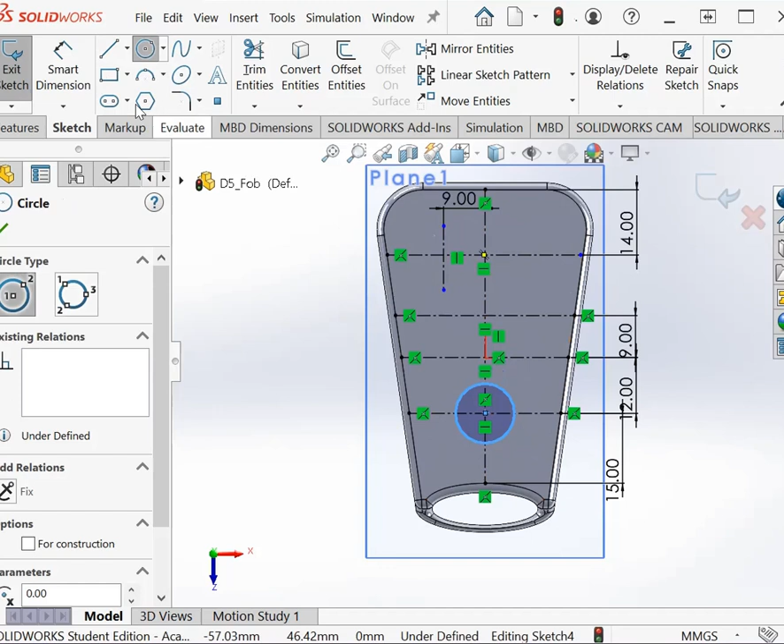So I'm going to draw a circle down here - all the circles are 10. I draw a circle there, and then a circle up here, making sure we get that intersection. Notice that little yellow Q at the end of my pencil shows we're at the intersection. Okay, I'm going to smart dimension those 2 circles at 10 millimeters.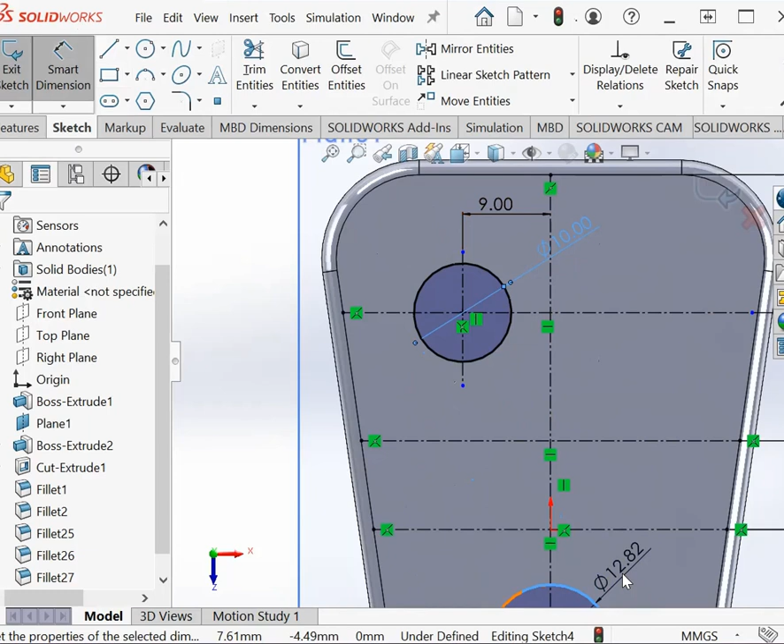This one should be 10. Okay, and then we want to mirror that circle. We could also just redraw it, but I'm just going to mirror it so I don't have to dimension it. And that mirrors across just fine. Okay, it's a fine looking part.

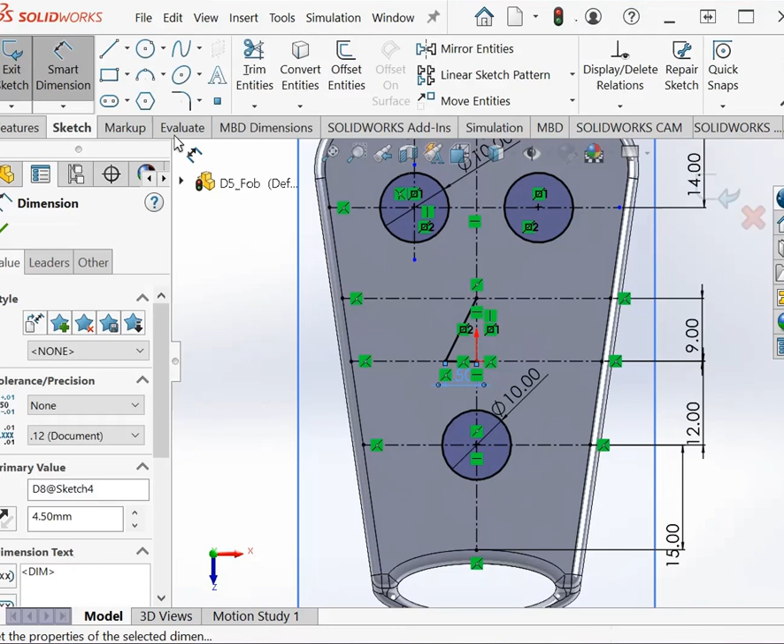Now we want to draw a triangle in the center, with the top vertex up here. I'm going to draw over here and then over there, and again I'm just going to use my mirror tool to draw the other side of the triangle. I have one more dimension to put in. This is 4.5, so 4.5. I've already dimensioned the height as 9, so I'm just going to mirror that across so I don't have to dimension it again. We have a nice triangle.

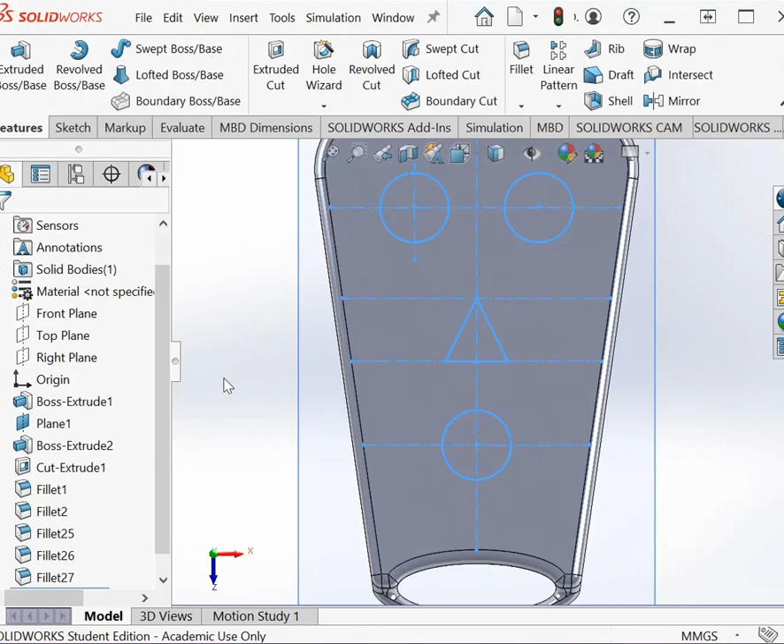These don't have to all be touching in order to be able to cut them all at once. We're going to extrude cut them down 2 millimeters. Okay, nice fine looking part. Let's make sure that it cut those correctly. Okay, so now I got holes, nice straight down holes. We actually want to use the chamfer tool now to make those at an angle.

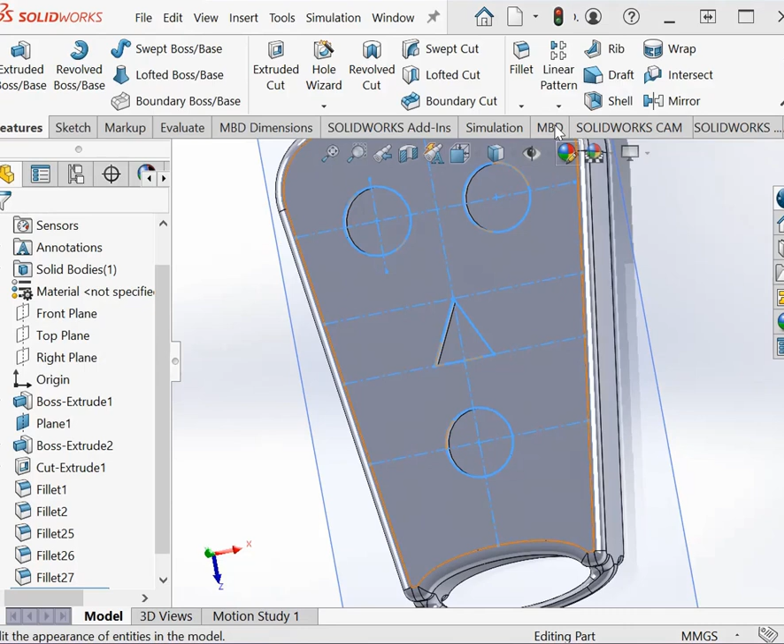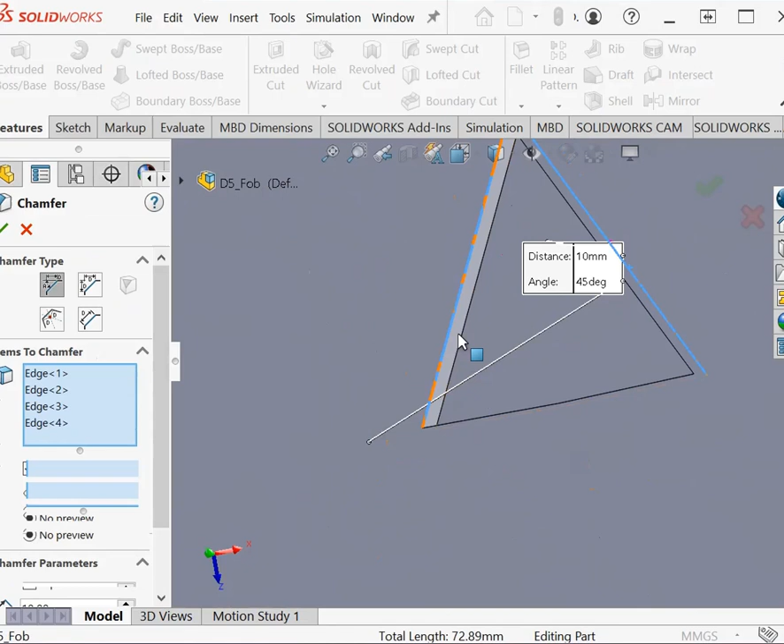Holes, chamfer tool. The chamfer tool is under the fillet. So I got a chamfer. Here it's important to select the top part of the hole. You'll have a different outcome if you select the bottom edge of the hole, but here I want to select the top edge. I'm going to chamfer all these shapes. I think I got the top line, so always zoom in to make sure you get the top line. Top lines are all those, and then the top line of the circle. Then I want to chamfer it 2 millimeters, at 45 degrees.

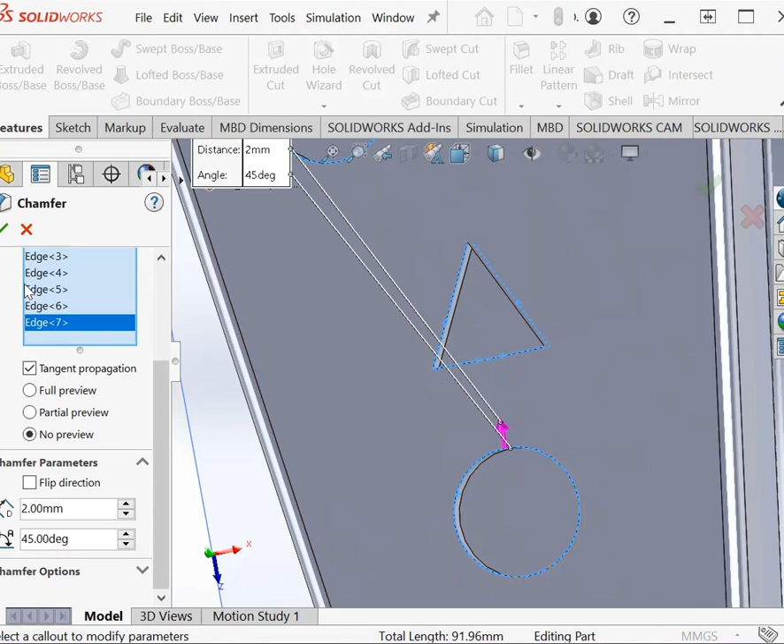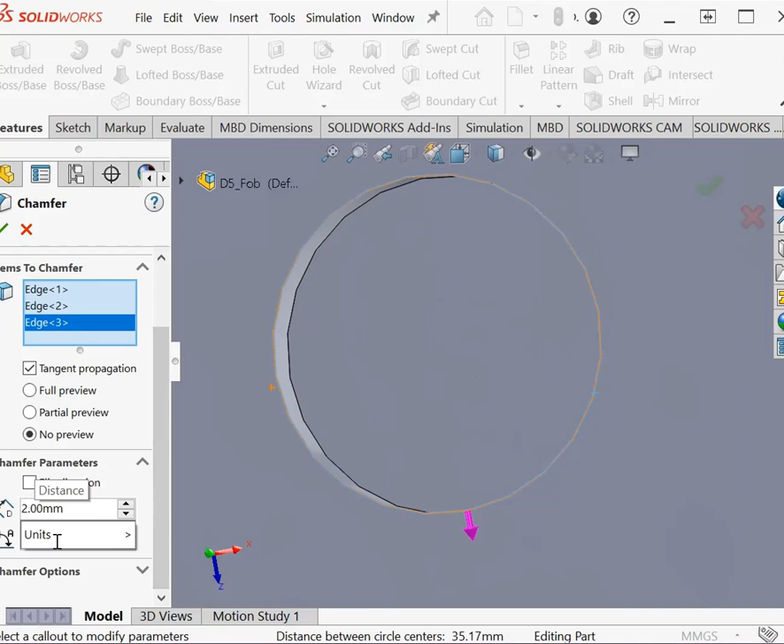So I hit OK, but it's not happy for some reason. Let's try that again. I'm going to hit rebuild, and we're going to try the chamfer again. Maybe I'll just do the circles first. Chamfer at 2, 45 degrees. Okay, that's a nice chamfer. Got the holes, now we'll work on the triangle.

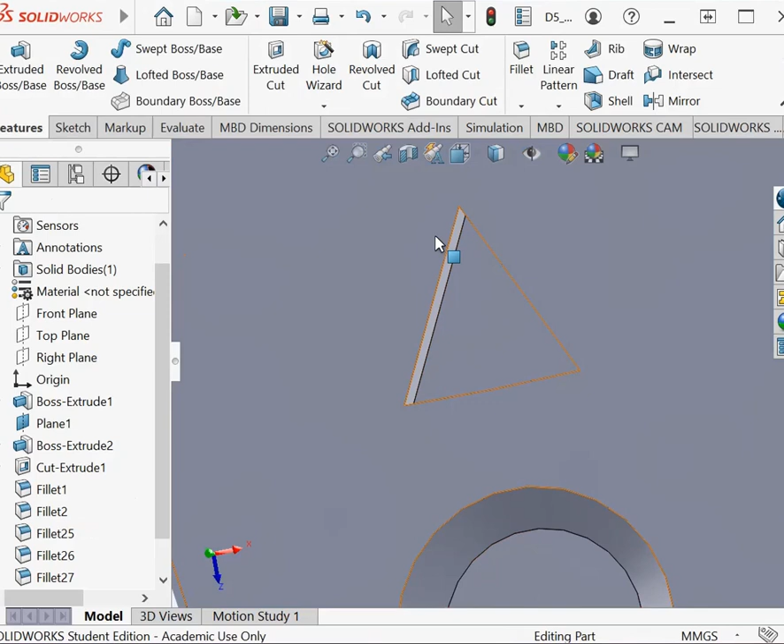It gives me a hint to save it, so it doesn't hurt to hit the save button. We're going to chamfer that triangle too. Where's chamfer? I want the top edge of that triangle, not the plane. Chamfer, and these top parts of that line. Okay, now it works, cool.

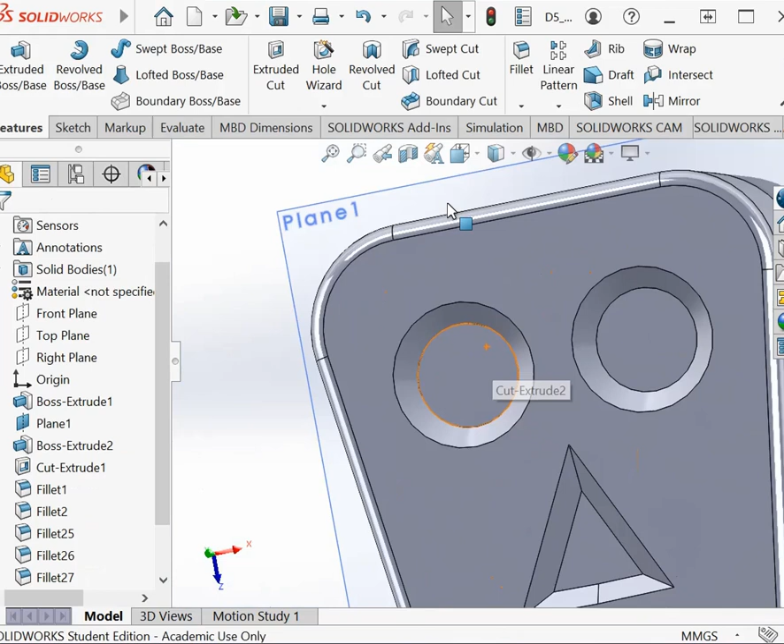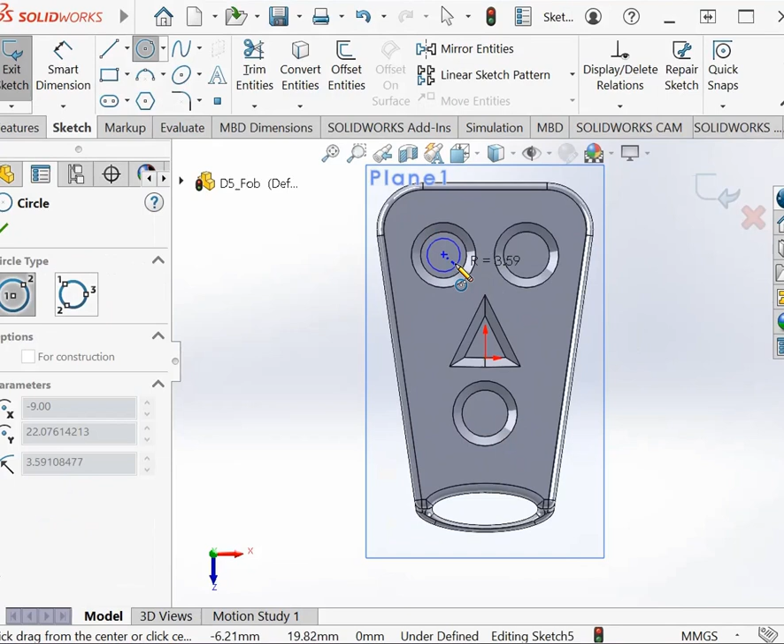Now I got to cut out some little recesses for my holes, and now I want to draw the buttons sticking straight back up again. So I'm going to go back into my sketch menu, and we're going to sketch on the bottom of those holes, on that same plane running throughout. If you're not getting a hint to where the center of the circle is, just hover over the edge and it'll give you a hint to where the center of that circle is. So I'm going to retrace those circles.

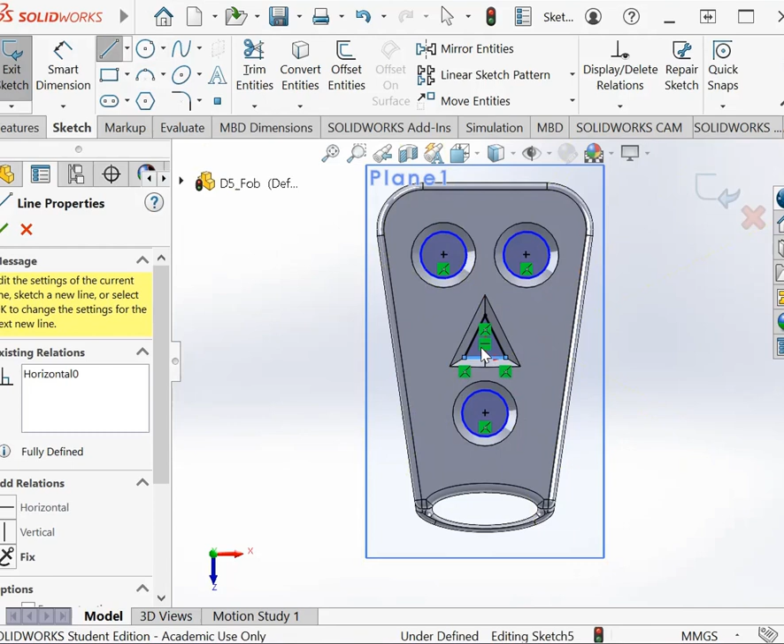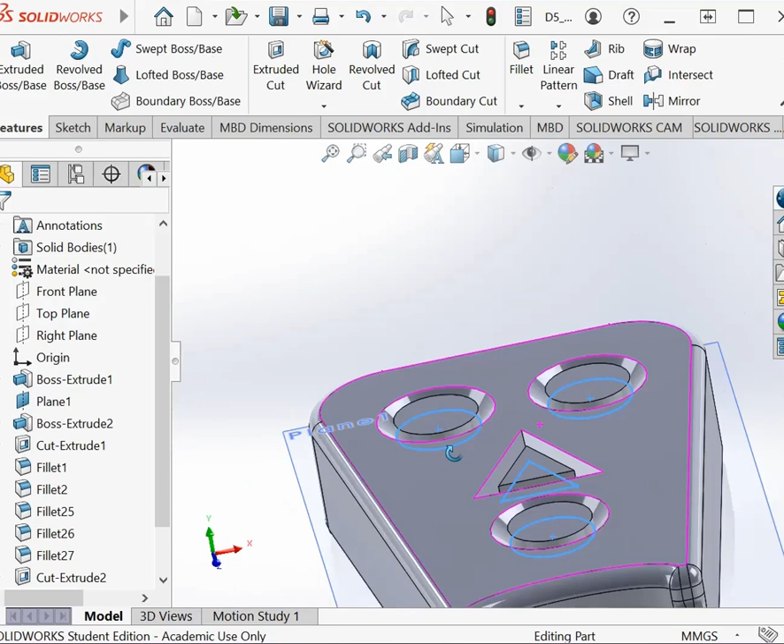Again, I could have used the mirror tool, but I'm not having to dimension it, so it's not all that. Then I'm going to use the line tool to trace the triangle on the inside there, using the hints that SOLIDWORKS is giving me that I'm hitting those points exactly. Now I have four closed shapes, and I'm going to extrude those out to 2 millimeters. So I have buttons. Now we're going to rotate it so you can see our handiwork. Those buttons are sticking up and are flush. Real buttons might actually stick out a little bit so you can feel them. But there is, in fact, our key fob, and it is finished and ready to go.

Okay, so hit save one more time, and that is the end.